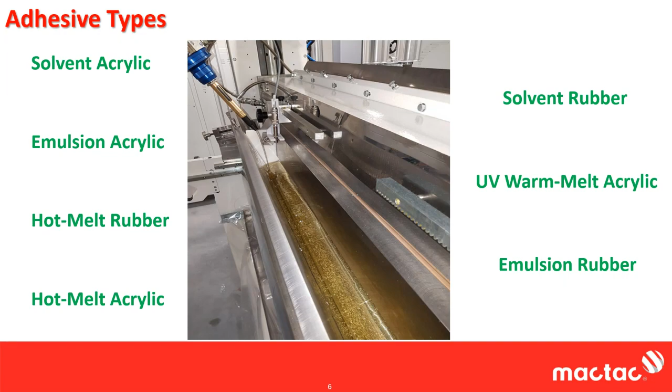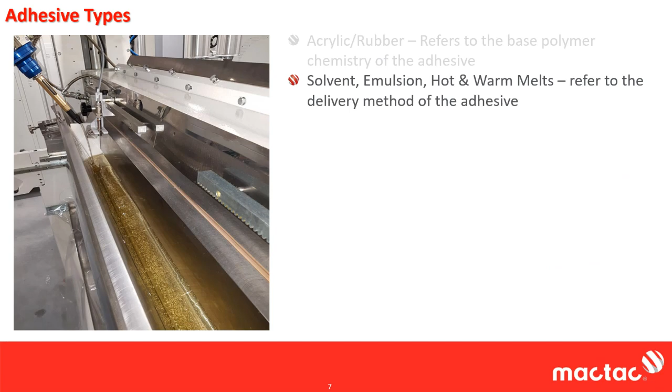So really what we're talking about here is that every time you hear rubber or acrylic, or even if we're talking silicones, although I don't really cover silicones in these because they're a very small part of the industry, what we're really talking to is the base chemistry of the polymer, the adhesive itself, really the framework that everything is built upon. If you hear rubber, you hear acrylic, it's a rubber or acrylic based adhesive, and then everything else, solvent, emulsion, hot melt or warm melt, that really refers to the delivery method of the adhesive, how we're getting the adhesive onto the web.

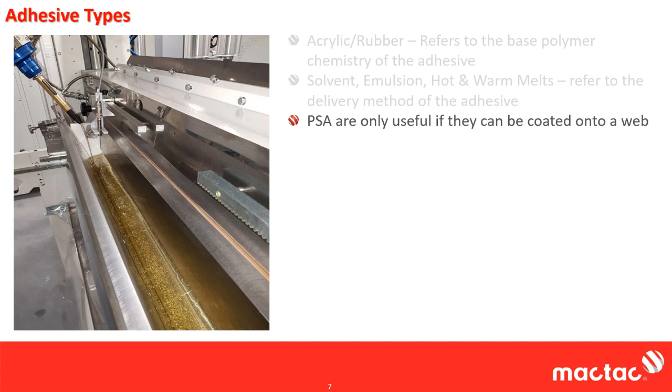And that's an important point in that pressure sensitive adhesives really only are useful if they are coated in a tape form or on a web. You can certainly dispense pressure sensitive adhesives the same way you would dispense, say, structural adhesives, but it really kind of takes the utilitarian or the utility out of them of being a tape and just being applied. So we really need to get them onto a web.

So when we talk about how we do it, the solution is that we're using some type of liquid carrier. Solvent-based adhesives use organic solvents to dissolve the adhesive polymer—this could be toluene, heptane, hexanes, MEKs, ethyl acetates, alcohols, things like that. With emulsions, we're using water, and all the adhesive polymers are dispersed in water.

These adhesives can range in viscosity from 500 centipoise to 25,000 centipoise. To give you an idea, water is 1 centipoise at room temperature. If you try to measure the viscosity of an adhesive that's already been cast out and cured, it'd be in the millions, maybe tens of millions of centipoise. So we've got to find a way to get it onto the web.

Solution adhesives are one solution, where we're actually dissolving the polymer into a solution to make it coatable. Another way we could do this is turn it into molten form, which is your hot melt adhesives. Hot melt, we're coating them, or melting them, at about 300 to 400 degrees Fahrenheit. We're making the adhesive molten, so it's down to a coatable viscosity.

Warm melts are the same concept, just using a lower temperature, hence warm melt. They're typically done anywhere from as low as 150 Fahrenheit up to 280 degrees Fahrenheit. That's really the difference between warm melt and hot melt—other than that, they're exactly the same. You're applying heat, making it molten, and that's how you're coating it.

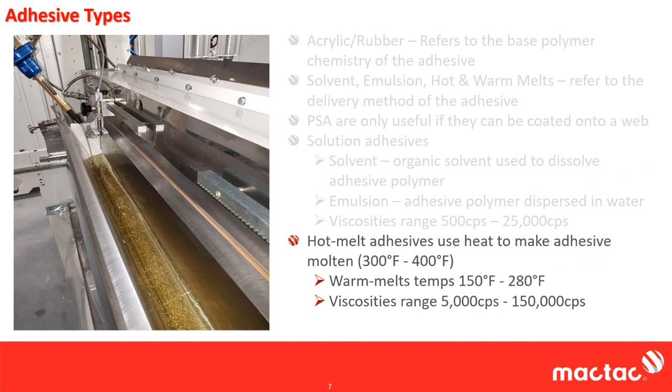With this whole presentation, I'm going to start really high level and kind of bring it down into the weeds. I really want to start high level because it gives you an idea of why these adhesives perform the way they do and the differences between them.

Starting high level, you've heard me say this before: pressure sensitive adhesives are viscoelastic materials, which is a fancy way of saying they're both liquid and solid at the same time. The visco part of the adhesive is what allows for the wetting out of a surface to form the bond. The elastic part is what we call the solid part, and that resists deformation—basically meaning you can't deform the bond.

An example I usually give here is maple syrup. Maple syrup is very sticky—you get it on your fingers, it's very tacky, it's sticky. The problem is it doesn't have any resistance to deformation. It doesn't have a lot of molecular weight to it, or guts, so you can very easily separate things apart from it, even though it's very sticky.

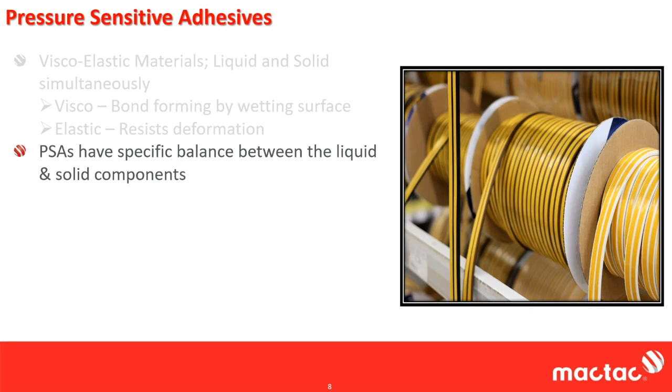Pressure sensitive adhesives have just the correct balance between the liquid and solid components. We usually refer to this as the Dahlquist criterion. I'm not going to go into it, but Janet hates when I use that term, so I like to throw it out there because it makes me smile. Really, the point of the pressure sensitive adhesive is to balance the liquid component, which makes the bond, versus the solid component, which helps maintain and keep the bond.

This is largely driven by molecular weight, or what we call molecular weight, which is really the size or the length of the polymer chain.

In previous webinars, we had some fun and I defined this using pasta. On the left, you've got macaroni and cheese with elbow macaronis, representing a smaller polymer size—a smaller noodle. It's very easy to reach in there with a fork or your fingers and pick out a single noodle at a time; there's not much resistance. Versus something with a higher molecular weight, like spaghetti on the right, which is a larger noodle—it's much harder to reach in and grab a spaghetti and pull that out from the bulk. You end up pulling out a lot of spaghettis, and there's a lot of entanglement—we call that molecular entanglement.

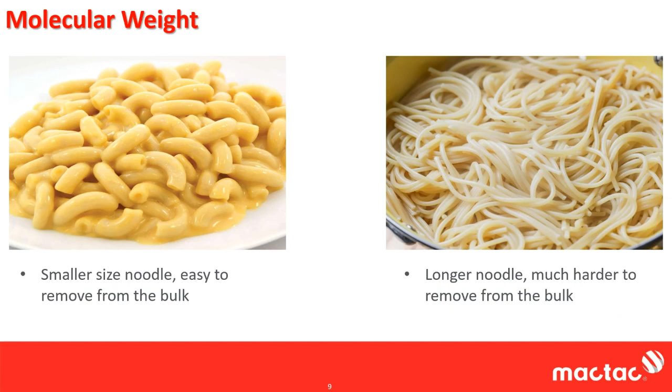Everything we're covering here is really driven by the fact that we need to coat the pressure sensitive adhesive onto a web—that's where it's getting its most value. The problem, and why I'm talking about molecular weight, is that in order for the adhesive to be of the proper molecular weight, so it can make a bond and hold a bond, it makes it very uncoatable—not very easily coated. In some cases, it's impossible to coat. So how do we get around that?

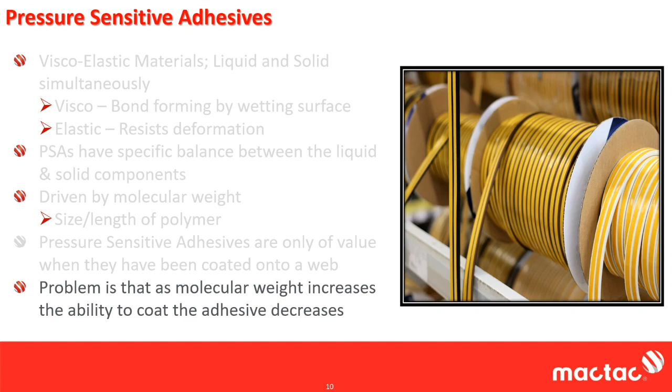How we get around that is adhesive curing, or what we call cross-linking. What we do here is, and this is mostly for acrylics—I'll be covering in this section the solvent-based and UV cured acrylics—they are the ones that cure. And this is the fundamental difference between acrylics and rubbers.

Acrylic adhesives have the ability to cross-link, which gives them all their properties that are so much different from rubbers. This sets them apart from rubber-based adhesives, and also from emulsion adhesives as well. So how we get an acrylic adhesive onto the web is we coat it on at a very low molecular weight.

That's much lower, far too low to ever make a good adhesive, but it does allow us to get it onto the web. And then we cure that adhesive, or what we call cure, sometimes called cross-linking. This happens in three different ways.

One, you can have the solvent evaporate. This is your self-cross-linking types of acrylics. Most of what's coated today for acrylic solvent adhesives are self-cross-linking. You have a catalyst, we call it a metal chelating agent, that's what kicks off the reaction, and it's surrounded by an inhibitor, which keeps it sterically hindered, meaning there are big molecules that don't allow that little molecule out to go find reactive sites.

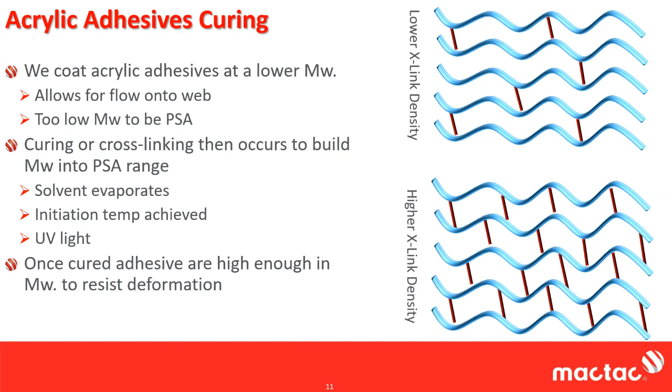Now, a question I get a lot is the difference between solvent and UV acrylics. One of my favorite examples I'm starting to use for explaining this is looking at a Tesla, or basically an electric car, versus the old tried and true internal combustion engine. I think this is a Toyota Camry I borrowed off the internet or something. So we have a Tesla and a Camry. Both are passenger cars, both have four doors and a trunk.

Both are capable, as far as I know, of holding five passengers. Both have four wheels, both rely on the same type of tires, both drive with the same controls. The difference is that we're switching out the tried and true internal combustion engine that's been around for 100 years, and we're putting in actually the tried and true electric motor, which most people don't realize has been around for 100 years itself.

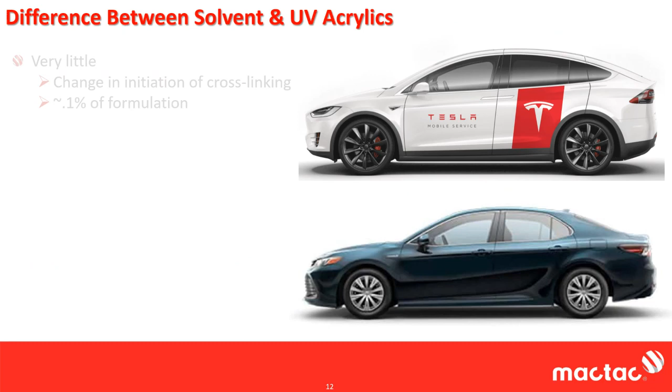The difference is that the electric motor usually isn't used in cars. It's tried and true, it's proven technology, it's been around for a while. We're just now starting to put it in cars and replace the, again, perfectly serviceable, nothing wrong with the internal combustion engine. That's how I view a lot of the differences between solvent and UV acrylics, and you'll start to see why.

So when I say what's the difference between solvent and UV acrylic, very little. There is very little change or difference. The only thing is a change in the initiation or the cross-linking. In most adhesives, that accounts for maybe 0.1% of the formula. The monomers that go into making the backbone of the acrylic adhesive are the same in a lot of cases.

Well, they're actually the same, and in a lot of cases, some of the vendors we worked with would simply take an old solvent adhesive, remove the thermally initiated cross-linker, and put in a UV cross-linker. Everything's basically the same, except we changed how those two adhesives cross-link. They're still cross-linking, it's just a change in how it happens.

What we see is they both have similar peels. There are solvent adhesives out there that have high peel, and there are UV adhesives out there that have high peel. In general, acrylics themselves, solvent or UV, max out at about 10 pounds of peel.

There are UV and solvent acrylics out there that have high shear. For us, we say 300 plus hours at a kilogram. Basically at 300 hours, we give up. We take the shear down because we assume it's not going to fail. So that's essentially maxing out the test, and we can max out those shear tests with UV and with solvent-based adhesives.

They're both going to have similar high temperature range, which is about 450 for acrylics. Getting much higher than that, you have to go into the silicone-based adhesives, but there are UV options and solvent options that will get you up to that high-end temperature range of about 450.

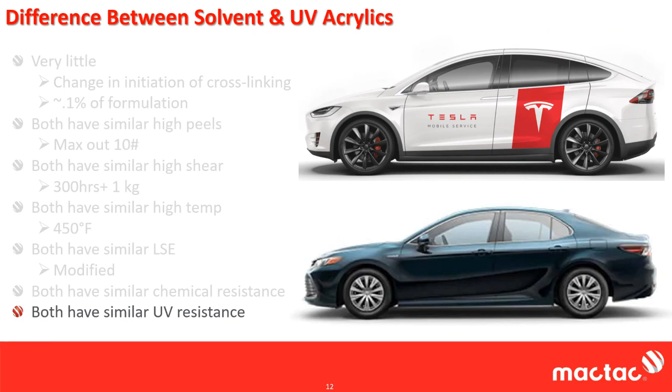Both have similar UV resistance. That's more about the backbone of the polymer of acrylic versus cross-linking. But again, both could be used in direct sunlight and withstand that for years.

So if they're so similar, why UV acrylics? Why did UV acrylics come about? The first thing I'll mention is that UV acrylics really came about mainly because of processing and handling, not because of any shortfall in performance properties that you would see at the end use application. So we're seeing UV acrylics because they're more efficient in the coating process.

No solvent equals no drying equals higher line speeds. The drying of the solvent, or even water if you're talking emulsions, the drying of the solution carrier will always be the rate limiting step when you're talking about solution-based adhesives. If you eliminate the drying, you can move a lot faster in terms of your line speeds.

You're also lowering your energy costs. Those ovens are burning a whole lot of natural gas in order to generate the heat needed to drive off the solvent carrier or solution carrier, solvent or emulsion. These ovens could be for a 60 roll label, 80 some inches wide and 300 feet long in some cases. It's a lot of natural gas.

And then you also have thermal oxidation for the solvent-based adhesives, where the EPA says you can't just blow solvents, VOCs, into the atmosphere. You've got to recover them or burn them off. There are regulatory benefits — you don't have the permitting or the disposal, any of the emission hassles, or any of the EH&S hassles with UV that you do with solvent. Again, environmental health and safety.

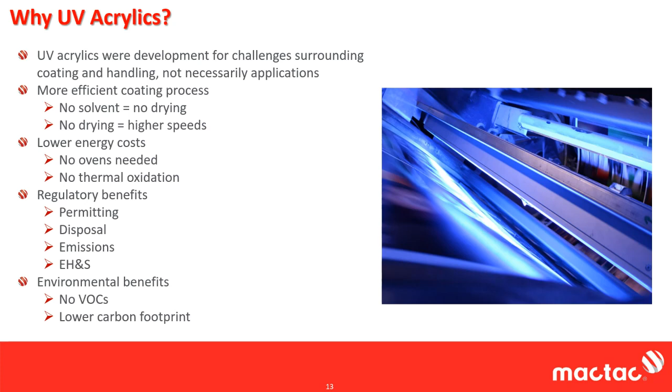When you look at your traditional properties of adhesion, it's more around the handling of it, the manufacturing of it, the efficiency of it. It's just the next step in the evolution, a lot like the electric car versus the internal combustion car. However, there are some advantages of the UV acrylic that aren't necessarily very obvious on the surface.

One of them is that with UV acrylics, you can get much higher coat weights. Solvent-based adhesives pretty much top out about 5 mils. There are some UV acrylics out there that are free radical cured, and vendors are touting up to 15 to 20 mils in thickness. Right now we don't coat any of them—we've evaluated them, we're just waiting for the right opportunity. But with UV acrylics, with the right curing system, you can get much higher coating thicknesses than you ever could with any solution-based adhesive.

Non-VOC, non-outgassing, and non-migratory—I'm going to put all these together. So when you see these three, you really think of environmental impacts. But what we found is that with VOC and outgassing—when I get to emulsions I'll cover outgassing—it's a little different than VOC, and migratory is anything that might migrate. There are certainly markets out there that do benefit from these properties.

Electronics, your high-end electronics, and your medical diagnostics are the two that come to mind. As electronics get smaller, there's no thermal mitigation there. Basically what I'm saying is there's no fans. iPhones, iPads, a lot of these devices don't have fans. These electrical devices get really hot.

So as they heat up, if there's anything in that adhesive that's going to outgas, eventually when it cools down, it has nowhere to go because there's nothing venting to any environment. In fact, a lot of times these devices are sealed so that you can drop them in water and they're not destroyed. So whatever's getting outgassed is going to stay in there. It's going to condense on that very delicate printed circuitry that's in there. And if you have a lot of unreacted monomers that typically exist in solution-based adhesives, that does eventually eat away at that circuitry.

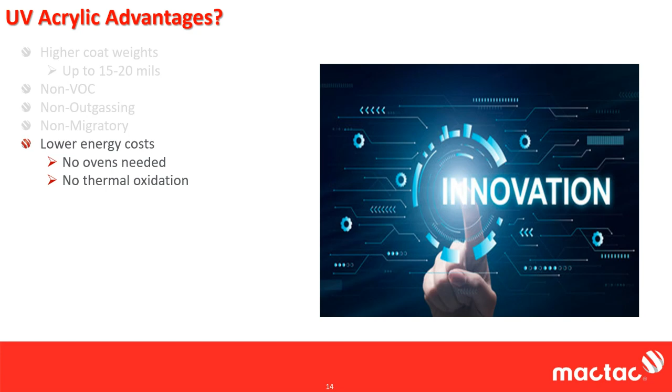Again, kind of repeating what I said before, but they're much more efficient to run. When we're burning natural gas, it's a non-value add. Nobody out there is going to worry about where we buy our natural gas or what type we're running, although I think there's only one type of natural gas. But basically, you get the idea that they are non-value adds. And again, with the regulatory benefits, just not having to deal with them is such an advantage.

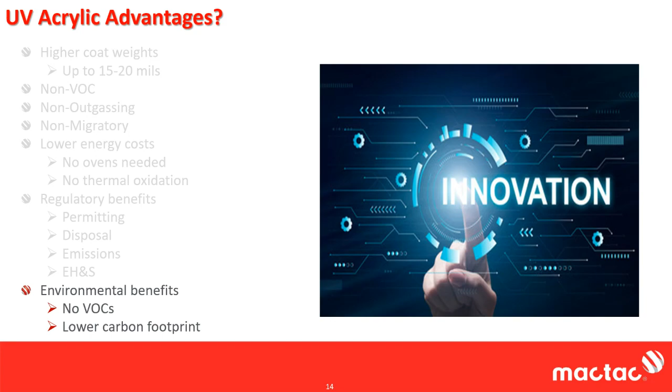So now we're going to talk about solvent acrylics. Are there any advantages to solvent acrylics? Well, just like the internal combustion engine cars, solvent acrylics are still relevant, and there are still some advantages to them.

The biggest one here being optical clarity. This is really one of your high-end window films and over-laminates. This is where your solvent adhesives are always going to be used. So with a UV or a hot melt adhesive, you can get a good clear—some people will refer to this as an optically clear coating, an optically clear film. A lot of what we consider optically clear really comes from going from a paper liner to a filmic liner.

That gets you probably 80% of the way there. But if you're talking true water white, which is a way of saying perfectly clear, you have no idea it's there, you can use it to laminate two pieces of glass together or have it as a glass over laminate and see no distortion whatsoever.

That is really a function of your solvent-based adhesive and the solvents that really slow the evaporation. When you have those types of solvents that take a while to evaporate, everything has a chance to really get nice and settle down, kind of get smoothed out, and you get a really nice coating.

We have not, and a lot of work's been done out there in the industry to try and make 100% solids be as optically clear as solvent-based adhesives. It just hasn't happened. So again, you can get a good clear coating out of a UV or a hot melt rubber. You can even get a good clear coating out of an emulsion acrylic, but you're never going to get that high-end optical clarity that you will out of a solvent adhesive.

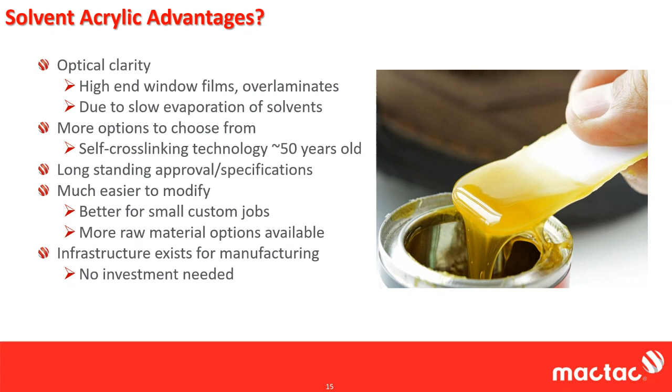So now I'm going to look at emulsion adhesives. I had a Tesla for UV, and I had a Toyota Camry for solvent. Emulsion gets a Vespa, it gets a moped.

Its transportation is capable of getting you from point A to point B. It might get one person, maybe two there, maybe not comfortably, maybe not very fast. And if the weather changes, you might be up the creek, but it's still a mode of transportation. This is how I'm going to pick on emulsions and say it's a moped.

But really, emulsions are adhesives that utilize water as the carrier. A lot of times the monomers you're using and the resulting polymers are very insoluble in water, so that's a trick of how they're manufactured. And how they're manufactured actually works on a lot of the same principles as detergents, dishwashing soap, and laundry detergent.

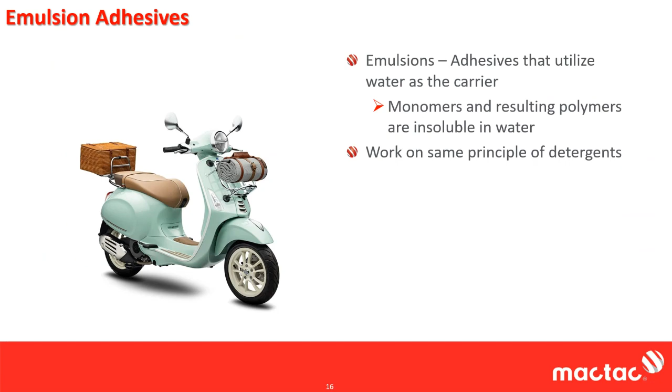Everything I'm about to show you, some of the commercials out there for like Tide show a lot of the same thing. But I'm going to show you this emulsion technology and how they're made, because it explains so much about the differences between them and their properties and attributes.

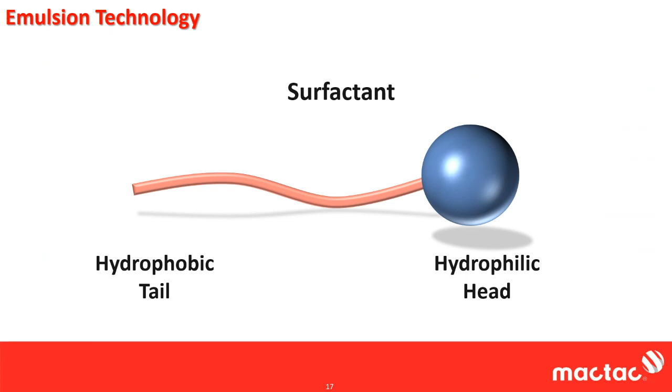So they're based off of surfactant. Surfactant is the main component of what we call soap, and they're unique polymers. The way that soap, or surfactant in this case for adhesives, works is that a surfactant is a molecule that has a hydrophobic tail and a hydrophilic head. So basically the tail hates water, loves oil, and the head loves water, hates oil. And because of that duality, this is how you get oil to mix in the water.

What you do is when you put them in the water, they form this. Since we're talking water-based adhesives, all the hydrophilic heads are going to be facing out, and all the hydrophobic tails are going to be facing in, and they form what's known as a micelle. This is some detail, but basically they form these big clumps, these big molecules, we call them colloids.

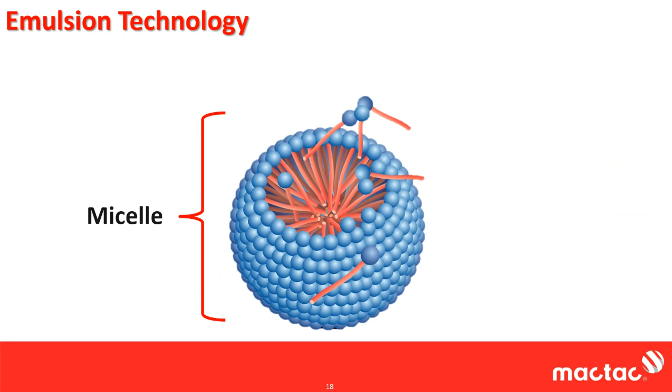This is the same principle as milk. And what we see here is, again, the heads are aligning out because it's an aqueous environment. The tails are lining in, and that's where the polymer is being made.

If we were talking dish soap, we'd be talking about that yellow thing spinning in there that I have representative of the adhesive polymer. For dish soap, that would be bacon grease or fat or something like that. For laundry detergent, that would be your dirt and your grime. In this case, it's polymer, and this is how emulsions work.

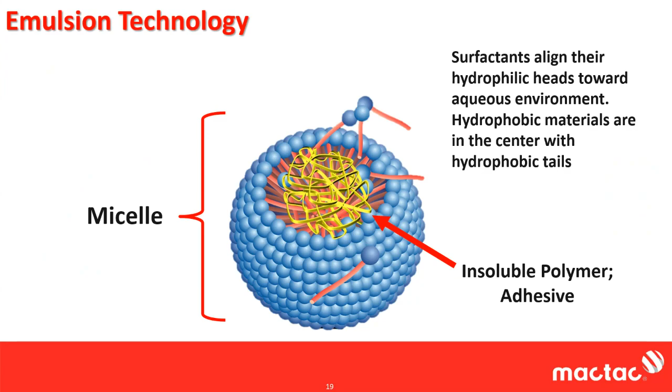You need these surfactants. You get all the insolubles encapsulated in a surfactant, and that's where the actual polymerization occurs. So again, I'm talking about this because this is the basis of the technology.

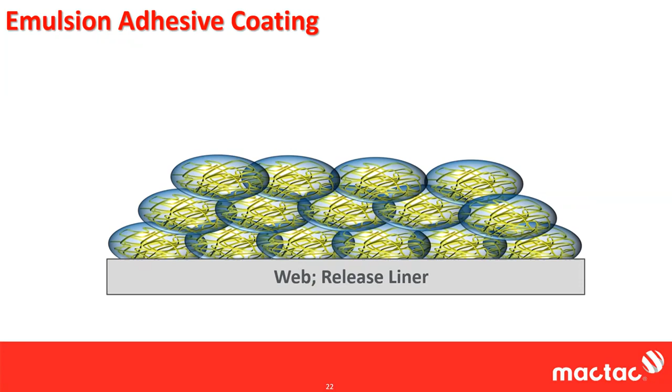And then you add a little bit more heat, and they start to flatten out, and they're really coalescing here. And you get, theoretically, a nice homogeneous polymer left behind. That is the theory.

So looking at emulsion adhesive attributes, one of the things we notice is that most of the emulsion acrylic adhesive developments have focused on making better labels. They focus on the roll label and graphics market. A lot of the technology out there is focused on making them better at converting for labels, or improving the weatherability or plasticizer resistance because they're used on vinyls. Not a lot of focus has been done on technical tapes for emulsion.

And a lot of that is because, you know, a lot of what I talk about is driven by molecular weight. Well, emulsions are really high molecular weight. In fact, a lot of people that know adhesives and polymers are mistaken or surprised to find out that of the adhesives, emulsions actually have the highest molecular weight.

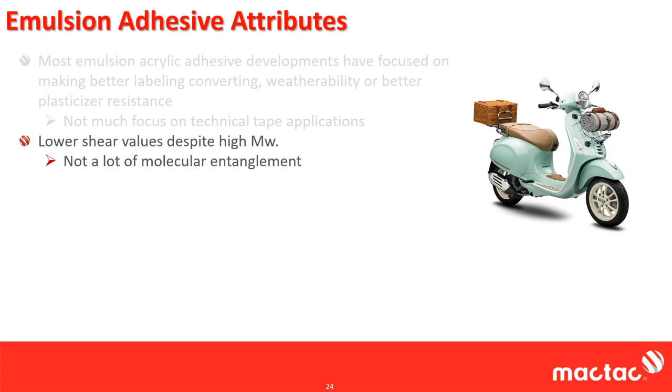But the problem is that you don't get a lot of molecular entanglement. If you go back to that polymer web, or the web with the dried polymer, I showed it as being homogeneous. In reality, though, you get more defined kind of domains. Since you're doing this polymerization in that micelle, and everything's kind of clumped together, you might get a lot of high molecular weight, but you don't get very much molecular entanglement.

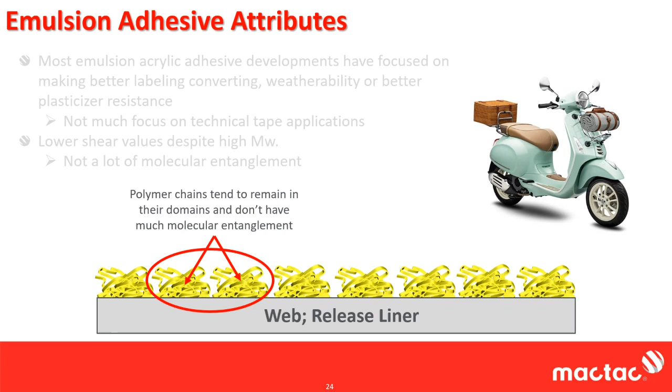Those clumps don't necessarily interact really well with each other. So going back to the pasta example, you're going from elbow macaroni to something much larger and heavier, such as stuffed shells. However, the stuffed shells aren't really entangled against each other like the spaghetti was, so it's still very easy to remove a stuffed shell versus the elbow macaroni.

So that gives you an idea. It's higher molecular weight, but you're not getting a lot of interaction between the polymer chains, so there's nothing there for cohesive strength or chemical resistance or anything like that.

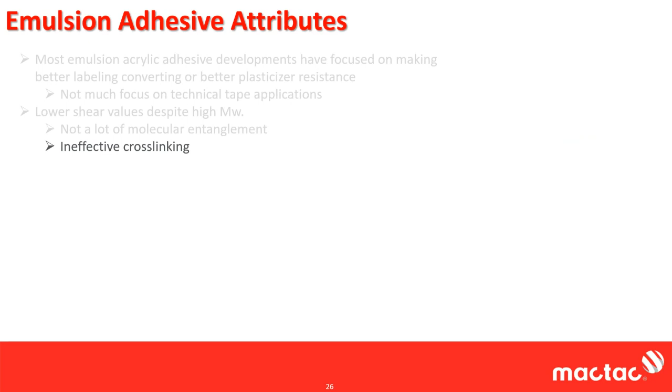Another reason why you don't see these used a lot in technical tape applications is, I'm having trouble defining this, but I call it ineffective cross-linking. Essentially what I mean is that, despite some misnomers out there, you can actually cross-link emulsion adhesives.

The problem is that when you add cross-linker, you get a lot of cross-linking that happens within the micelle. And a lot of the reason why people cross-link emulsion adhesives is not to make them more cohesively strong, but to actually kill the tack and turn them into removables.

This is something MacTac does on our roll label side a lot, where we use a lot of emulsion adhesives. We can add tack or cross-linker to them externally, and we could take a permanent adhesive and make it into a removable adhesive.

But you can't really get that cohesive strength up much. It does increase a little bit, but you're never going to get it up to where the solvent-based and the UV adhesives are, mainly because you're getting a lot of cross-linking within the micelle, but the micelles themselves aren't really interacting.

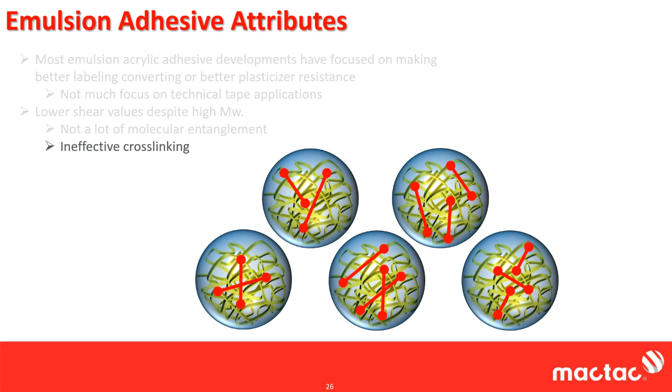Now, I will say, very recent developments are starting to show newer generations of emulsions improving this property. As things are coalescing onto the web, you do get some interaction and cross-linking between those micelles. Because the cross-linking can occur between micelles and these conglomerates of polymers, you're starting to see more and more properties comparable to solvent acrylics and UV acrylics.

So this is something that at MacTac we're watching very closely. We have some technology that we're utilizing around this, and we're looking to really push the boundaries of what you could do with emulsion adhesives.

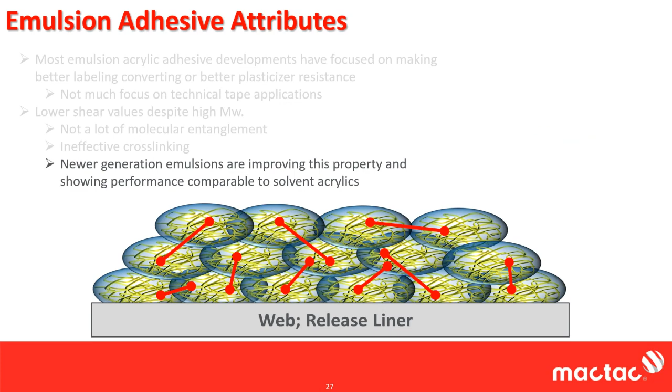Again, historically, you couldn't get this type of cross-linking, so emulsions were never really used for technical applications, because this type of cross-linking is where you get your temperature resistance, your chemical resistance, and a lot of things like that. We're starting to see it now.

So one other attribute of adhesives, unfortunately for emulsions, is that we do see lower adhesion values. Again, I focused on the manufacturing for emulsions to kind of explain this. You have to use a lot of secondary additives for emulsion adhesives, and that really hurts their peel performance.

The surfactants in there are going to hurt peel performance. The thickeners, you have defoamers, you have wetting and leveling agents. You even have antimicrobials in there to keep the fungus and mold down that will attack an emulsion adhesive.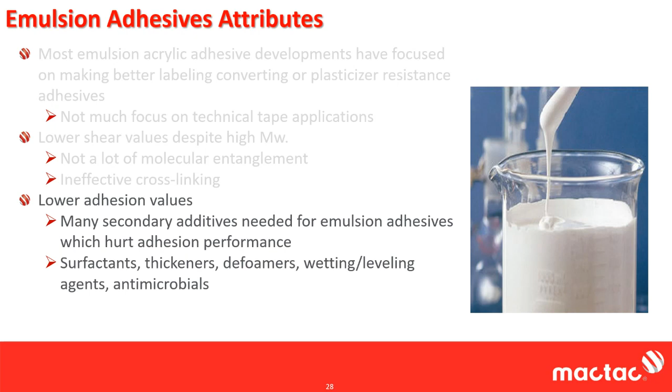Those would be too thick. You wouldn't be able to dry them. The web would be too inconsistent. You'd never be able to slit through them, things like that. Another attribute of emulsion adhesive is that you're going to be limited in your coating weights.

2 to 3 mil max is what you're going to see in your emulsions. Again, water is very hard to dry. Water is a very unique carrier in that it has the highest of all boiling points. So at low coat weights, you can hit it very hard, very fast, very hot, and get it dry, but that's up to about 1 mil in thickness.

Above that, it becomes a law of diminishing returns, and you start skinning it, and you can't get them dry. So with solvent-based adhesives, you can get 5 mils. With water-based, 2 mils, maybe 3 mils if you're willing to tolerate a lot of residual moisture there.

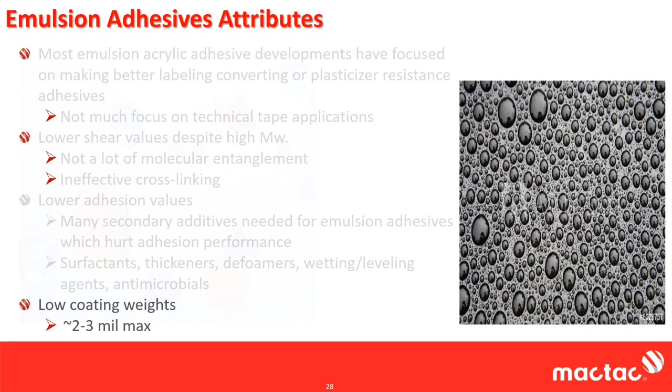So why emulsion adhesives? There had to be a reason why they came about. Well, one is that they are economical. They are the most cost-effective acrylic option out there. One of the downfalls of solvent is that organic solvent costs about as much as a gallon of gas per gallon of solvent. Right now that price is climbing, it gets depressing going past the Circle K every day.

I think for us, gas is about $2.89, $2.85 a gallon. Water is essentially free. Another thing here is economy of scale. Paint—a lot of your emulsion adhesives are based off the same raw materials that go into paint, and paint is far bigger in scale than pressure sensitive adhesives ever are.

So you do get a lot of economy of scale there. And again, with your emulsion adhesives, depending on the thickness, you usually do get a lot higher run speed, especially on the roll label side. Those coaters can run 3,000 to 4,000 feet a minute, but again, you're talking very low coat weights, below 1 mil.

Emulsion acrylics, especially compared to rubber—and I'm going to have a table up here where I compare all these attributes to each other with rubber—you still get pretty moderate temperature resistance out of an emulsion acrylic, around 250. A lot of rubbers crap out about 180; you get about 250 out of an emulsion.

You do get some moderate chemical resistance, especially on the plasticizer side. You're going to get UV resistance—again, better than a rubber, not quite as good as a solvent acrylic, but still pretty good. And really, emulsions are good for general purpose adhesion, something that doesn't necessarily need a lot of shear or high adhesion or shear strength.

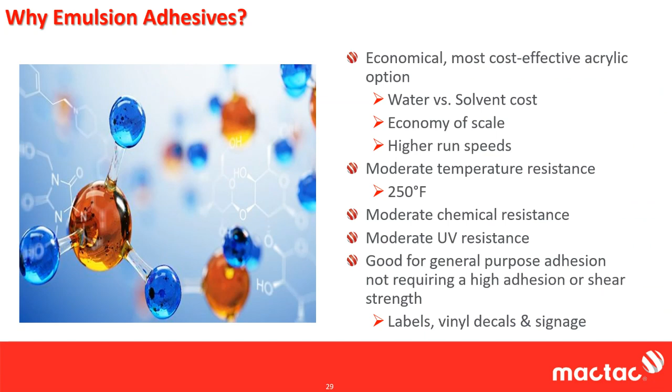So you've seen a lot of emulsion adhesives in your labels, vinyl decal signage. You see some cheap double coated emulsion adhesives come overseas for point of sale types, things like displays, short-term use, just needs to stick two surfaces together. So really it comes down to what you need it for. There's nothing wrong with emulsions. They're not necessarily as high performing—that's starting to change. It's just a matter of what you need it for.

So I threw a lot of information at you pretty fast, so I'm going to slow it down here. I filled out this table with a bunch of different attributes, the 3 acrylics, and then everybody always asks how does rubber and acrylic stack up, so I have rubber on here as well.

The first thing's going to be adhesion. Your solvent and UV acrylics are going to be pretty high adhesion—this scale goes from 4 pluses to 1 negative. So again, 10 pounds for solvent acrylic and UV acrylic, pretty high. Emulsions usually top out at 5 or 6 pounds for a comparable coat weight. And then actually rubbers—nothing's going to touch rubber in terms of adhesion. Rubbers are always going to be your highest adhesion options. They'll get 15, 17 pounds at the same coat weight.

In terms of LSE adhesion, so again, same peel tack but off of a low surface energy type plastic—again, solvent acrylic and UV acrylics are going to do about the same. You can put tackifiers in there. Emulsion acrylic, you can tackify emulsion acrylics, but again, because of all the other additives that are in there, you're never going to get as high as the other two. And because rubbers themselves are low surface energy materials, they're always going to outperform the acrylics there.

In terms of shear, you get pretty good shear—comparable shear out of the two, UV and solvent. Emulsion acrylic, you're going to get a 1. Again, this is starting to improve, but you don't get really high shear out of emulsions because you don't get a lot of interaction between the polymer chains. Rubber, you get a lot of interaction there, so that's a 4.

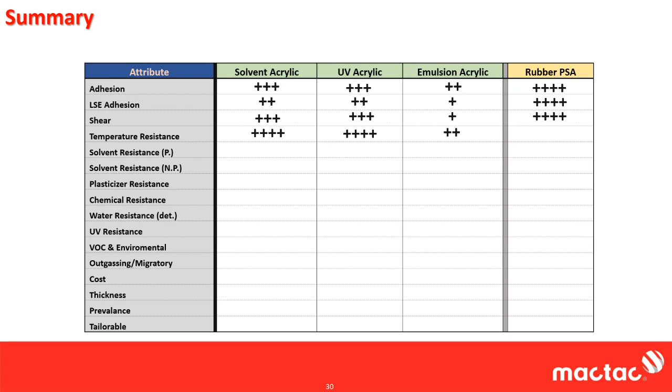Now, in terms of temperature resistance, the UV and solvent acrylics are going to be quite high. Emulsions, you're starting to get some temperature resistance there, and rubber PSAs are just terrible. Again, all rubber PSAs can be considered hot melts, even if you coat them out of solvent, which means they're going to turn molten as soon as the temperature starts going up.

If you're bringing in polar solvents, this is your MEKs, your acetones, your ethyl acetates, your alcohols. They won't redissolve, but they will swell in those environments. Depending on the amount of crosslink, it determines how much they swell, as well as some monomer selection. But emulsion acrylics, they'll do okay, but they will solvate. Rubbers actually do very good in terms of polar solvents. You can pour alcohol on a rubber, and because of the difference in polarity, it's not going to touch it.

Now, when you get to non-polar solvents, again, same for the solvent acrylic, UV acrylic, emulsion acrylics, you can get a little bit more solvating there. And with the rubber adhesives, they're terrible. They're going to solvate right in. As soon as you put like a heptane, a hexane, or a toluene, rubber PSAs are just going to fall right apart.

Plasticizer resistance, all the acrylics are going to get high marks there. Even the emulsions, again, really good at plasticizer resistance. See vinyls all day long. Rubber, terrible, just terrible with plasticizer resistance. They're going to fall right apart.

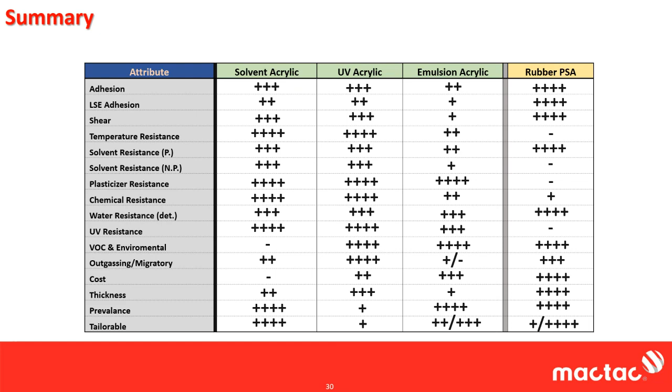So this is the summary here. Hopefully I gave you an idea of some of the applications based off these attributes, and you learned something here. But I am pretty much finished, so we will open it up to questions.